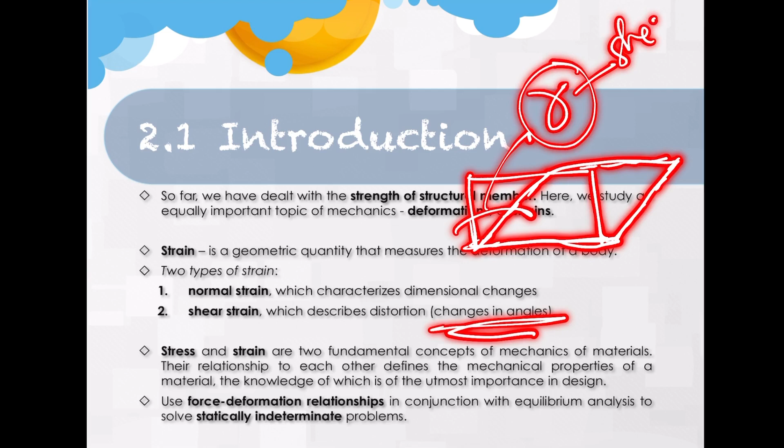So stress and strain are fundamental concepts of mechanics of materials. Their relationship to each other defines the mechanical properties of the material. It's important to know the stress and strain.

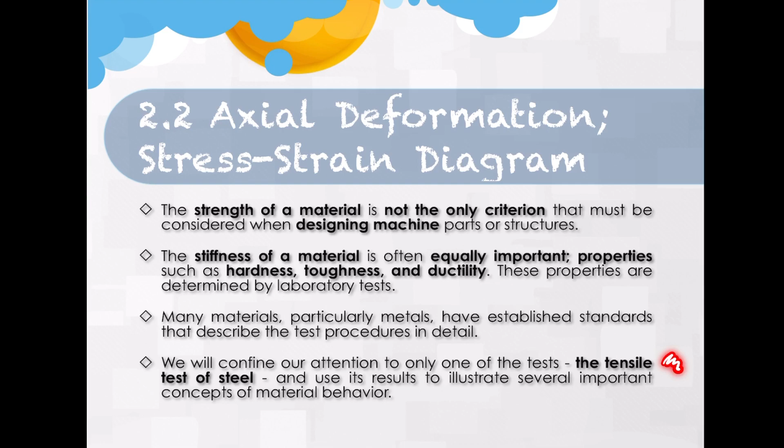We will confine our attention to only one of these tests, which is the tensile test of steel, and use its result to illustrate several important concepts of material behavior.

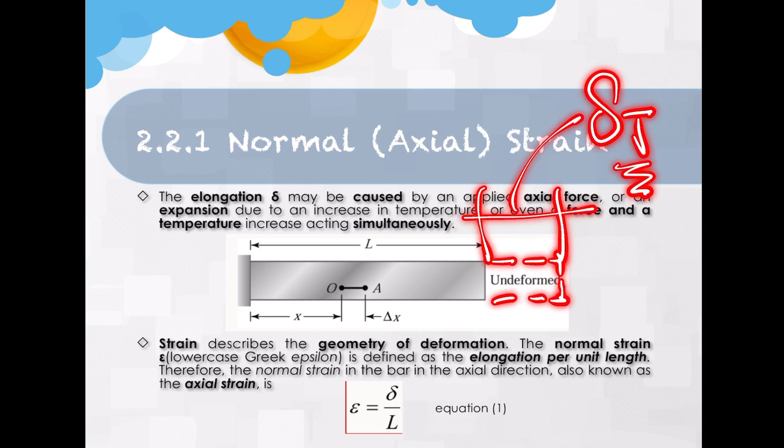Strain describes the geometry of deformation.

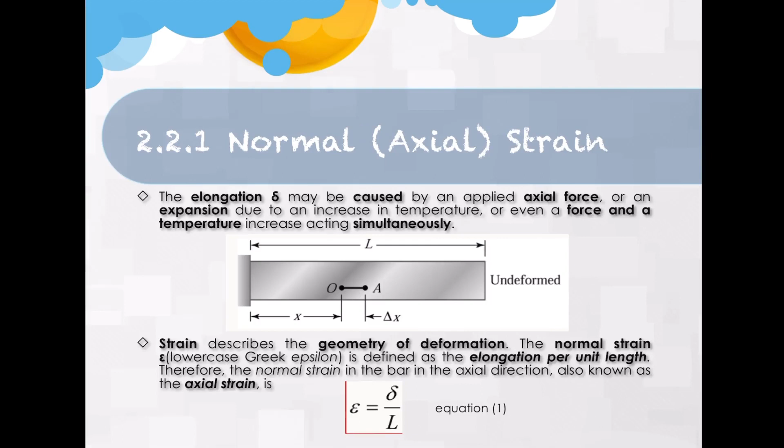Epsilon. Deformation, kung pila yung giinat, say in mm per unit length. So, kani siya nga length say in mm. So, mm per mm, pwede na siya mag-cancel out. Or say inch per inch. So, mag-cancel out. So, kaning strain is a dimensionless quantity. However, units such as this one are frequently used for normal strain.

If the deformation is not uniform, so dili siya uniform ang shape sa imong bar. Ang pag-apply sa load, dili uniform. May possibility ang pag-deform ana nga bar or sa structure is not uniform. So, gamitan na siya og integration. So, kung pila yung deformation kada unit length.

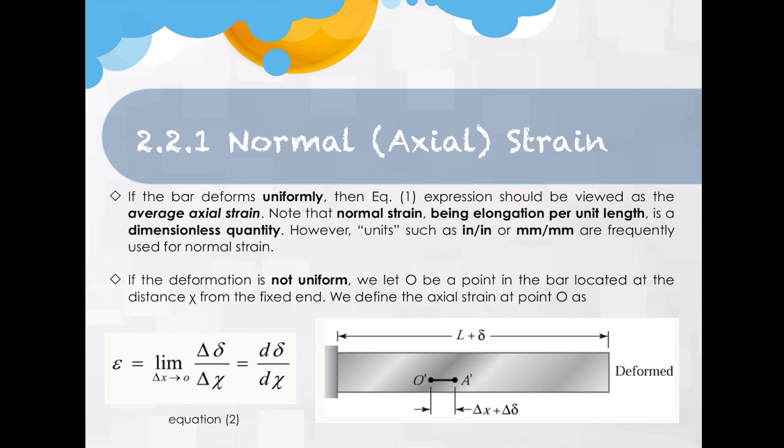So, magkakaroon unit strip of length dx. So, kung pila din yung deformation, i-add mo siya from this point padulong sa pinaka-end sa length, from 0 to end. So, i-add mo tanan or integrate mo tanan deformation from 0 to L para makuha nimo iyang total or average na value.

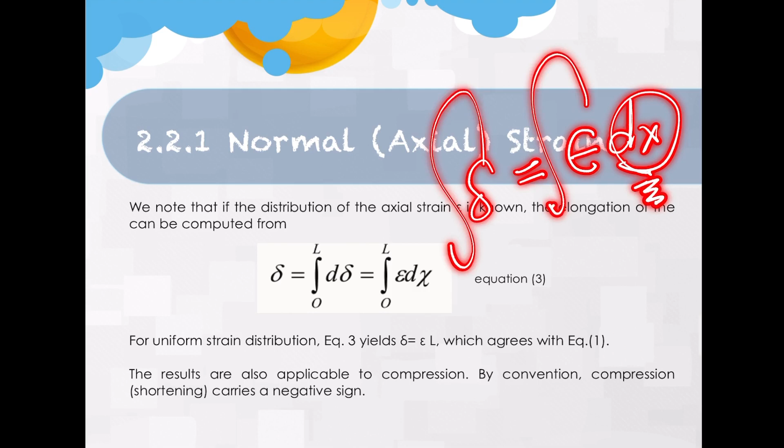So, deformation equals strain times length. Per unit length yung mga i-add. So, i-integrate or i-add ni mo tanan. Parihas pa na siya sa equation ganina. Deformation, strain, length, where kana siya is dx, or strain is equal to deformation per unit length.

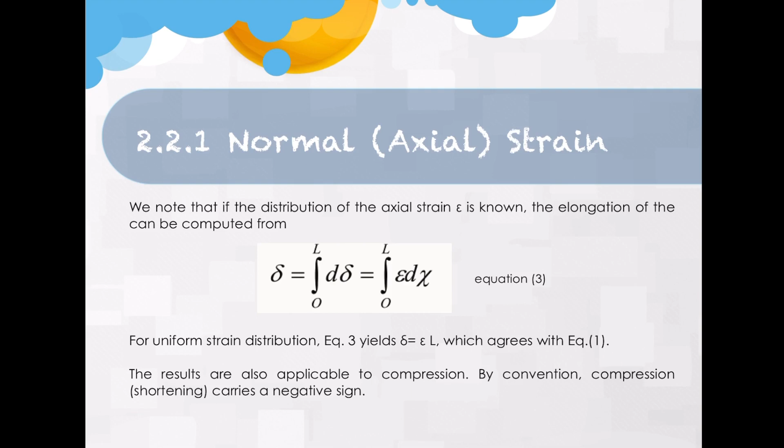The results are also applicable to compression. So, hindi lang ang pag-elongate or tension. But, if imuhang structure is subjected with a compressive force, then there is a shortening na mahitabo. So, imong deformation karon is negative iyang value. Carries a negative sign if the structure is subjected with compressive force.

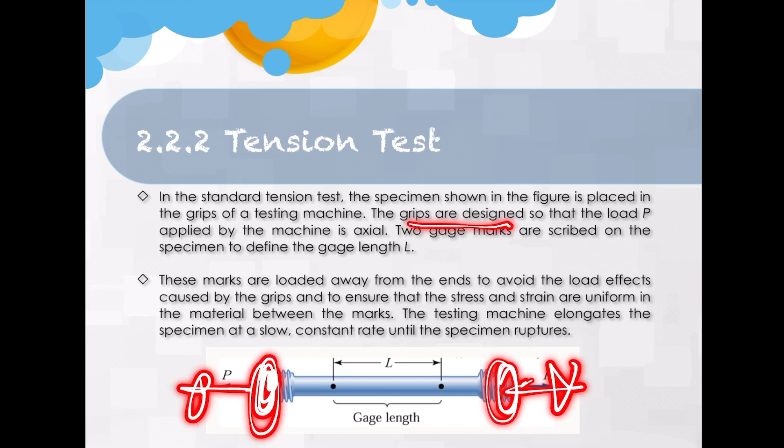So, what's mahitabo if we subject our, say, steel. So, in a standard tension test, the specimen shown, say, steel bar, in the figure is placed in the grips of a testing machine. So, grip siya dira, both sides. I-apply na siya og force. So, giinat siya. The grips are designed so that the load P applied by the machine is axial. So, along this axis. Two gauge marks are scribed on the specimen to define the gauge length L.

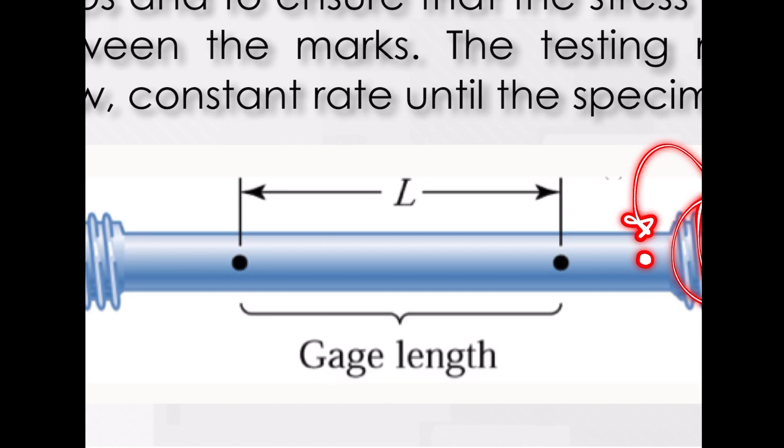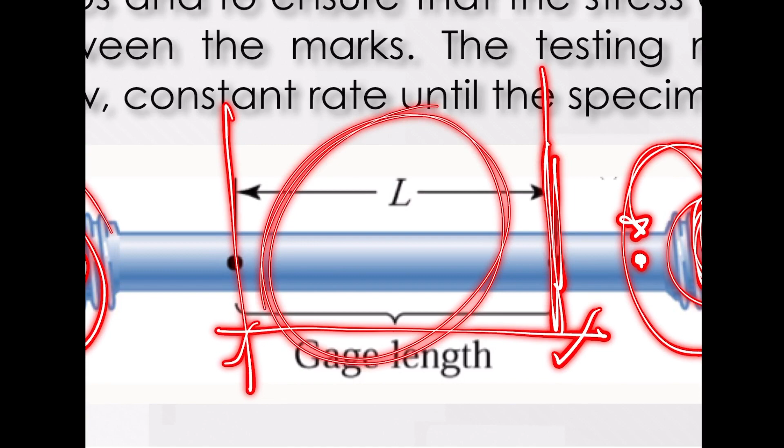So, sa bar, dili pwede nga mag-gauge sa ends. Kay maapektuhan man na siya diri, effect. Kaya doon ra siya sa katong gainat. So, mangita ka og length na medyo layo from the ends na i-apply og force para makuha nimo kung uniform gid ang deformation ana nga particular segment sa imuhang bar. These marks are located away from the ends to avoid load effects caused by the grips and to ensure that the stress and strain are uniform.

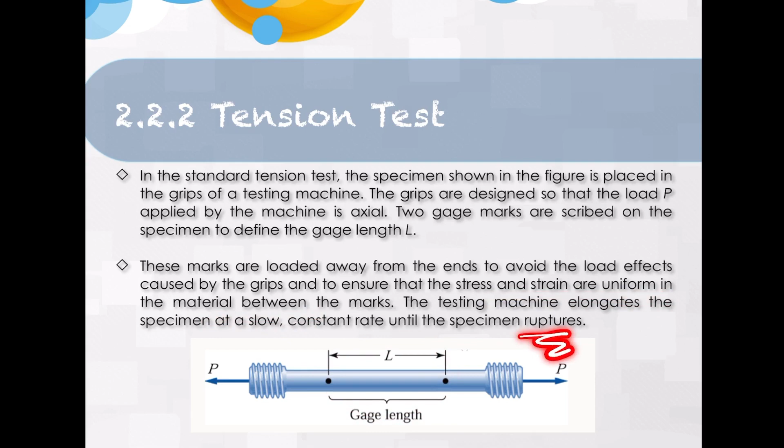So the testing machine elongates the specimen at a slow constant rate until the specimen ruptures or fails. So, unsay result dayon? Kani siya tension test of steel, ug iyahang corresponding diagram. So, i-apply siya load, corresponding increase sa value sa stress and sa value sa deformation or strain. So, from 0 padulong diri up to a certain point nga ang ginatawag is proportional limit.

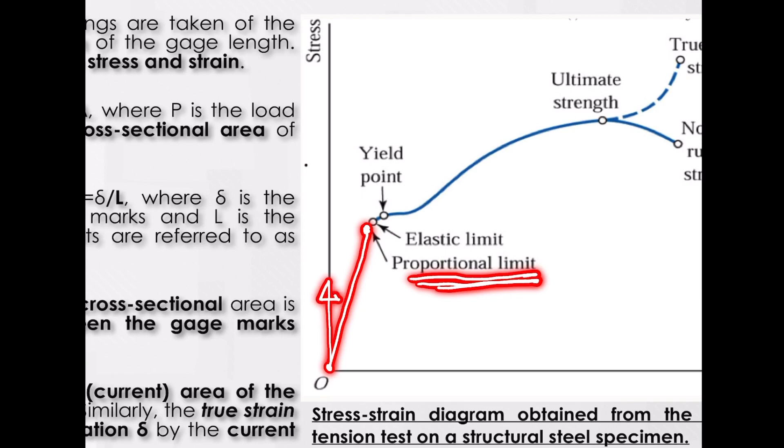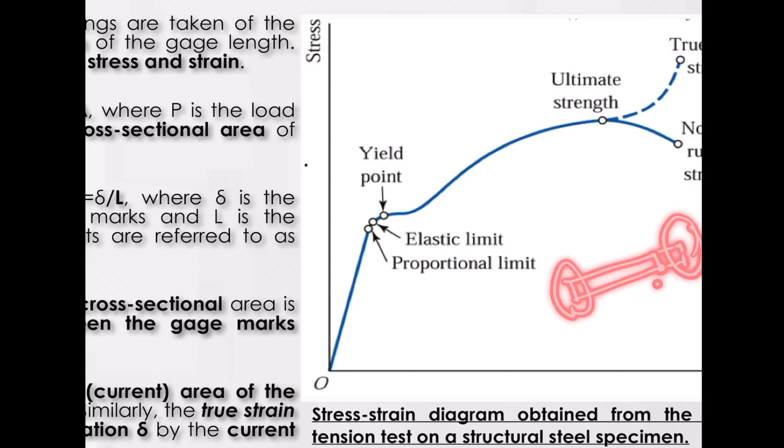Proportional meaning proportional ang imong stress sa strain; ga-increase imong stress, ga-increase pod ang imong value sa strain. Pero up to this particular point lang. So, giinat pa gid siya og ayo, niabot siya sa iyang elastic limit. Kaning elastic limit, original nga length, giinat nimo siya, so nadungagan siya. Pag imuha na siyang i-release, meaning katong nag-grip sa sides imuhang kuhaon, mubalik siya sa iyahang original nga length.

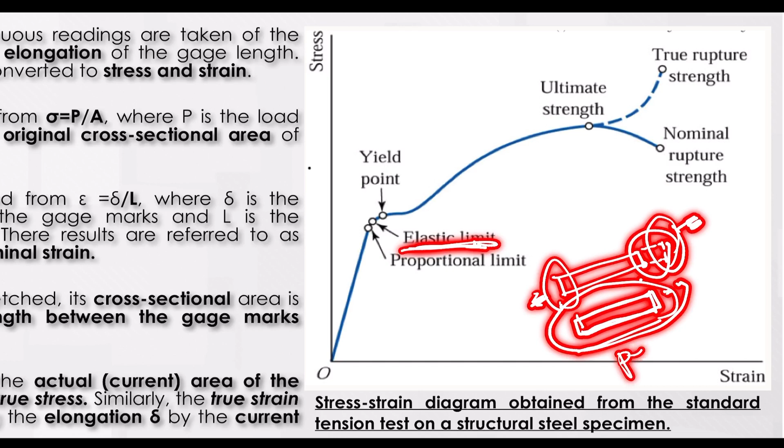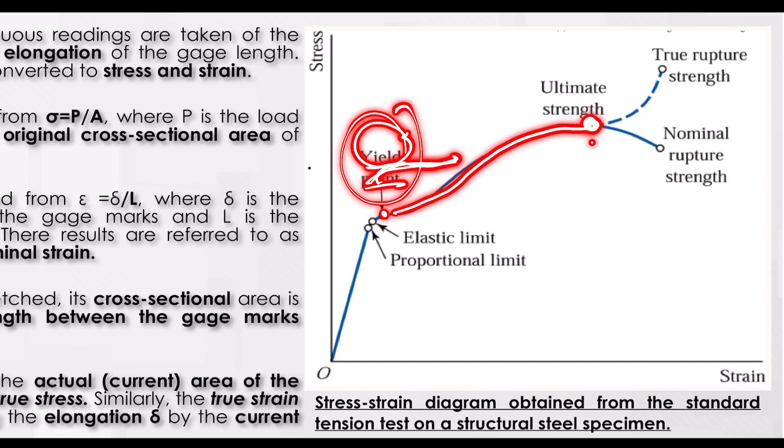Pero if there are cases nga naa gihapon gamay nga elongation, ang tawag ana is permanent set. So, gi-deform gyud siya. So, continue nga gi-apply ang force until maabot siya sa yield point. Kaning yield point, meaning ni-yield na gyud ang imong steel. Kung niabot na siya sa point nga nag-deform na siya, nagpadayon lang siya deform, mag-give way. Until niabot siya sa iyang ultimate strength, ang pinaka-last na strength na iyang gi-exert before siya nag-rupture.

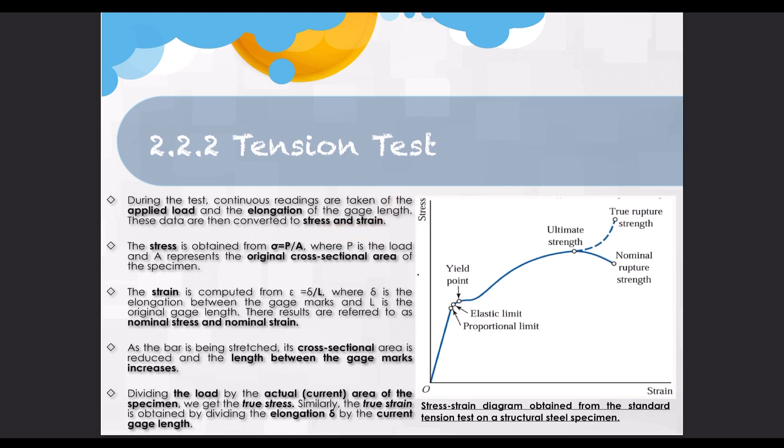Okay, during the test, continuous readings are taken of the applied load and the elongation. So, nakahimo siya og stress and strain diagram. The stress is obtained from the formula stress equals load over area, where the load is the actual applied load, and the cross-sectional area of the specimen nga gi-test.

Ang strain pod is computed using this equation. So, epsilon, deformation per unit length. Dayon, elongation between katong gauge marks niya nga gibutang. Tapos, ang length is the original length. So, ang result ani is nominal stress and nominal strain.

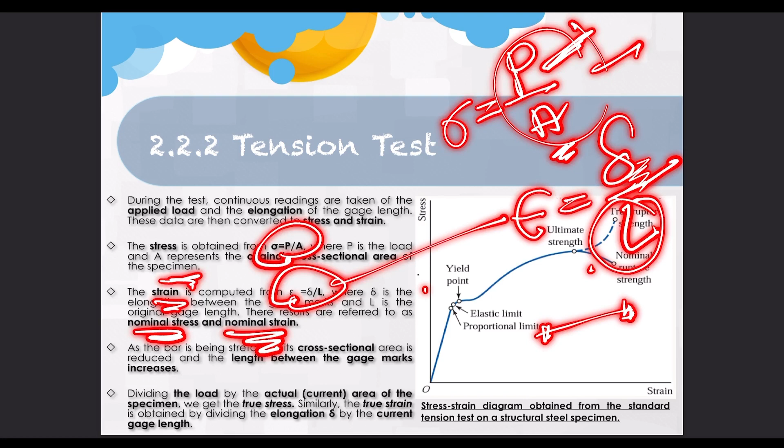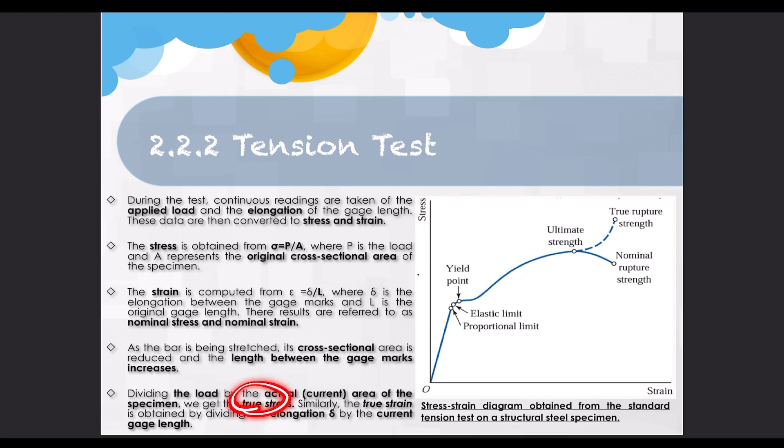As the bar is being stretched, the cross-sectional area is reduced because it's being elongated, so the length between the gauge marks also increases. The gauge marks become taller compared to the original gauge length before the specimen was subjected to force. Dividing the load by the actual current area of the specimen that was stretched, you get the value of true stress. True strain is the elongation divided by the current gauge length, the length that was stretched, and you get the value of the true strain.

As seen in the figure, the stress-strain diagram is a straight line from point O to the proportional limit. This plot is a manifestation of Hooke's law, meaning the stress is proportional to strain.

So we have the equation, this is called Hooke's law: stress equals modulus of elasticity times strain. Modulus of elasticity is specific to the material you are using. It's a material property, known as the modulus of elasticity or Young's modulus. Its unit is Pascal or PSI. This is usually given in the problem, depending on what material is used. For steel, its corresponding value is 29 times 10 to the power 6 PSI, or 200 gigapascal, where giga means times 10 to the power of 9 Pascal.

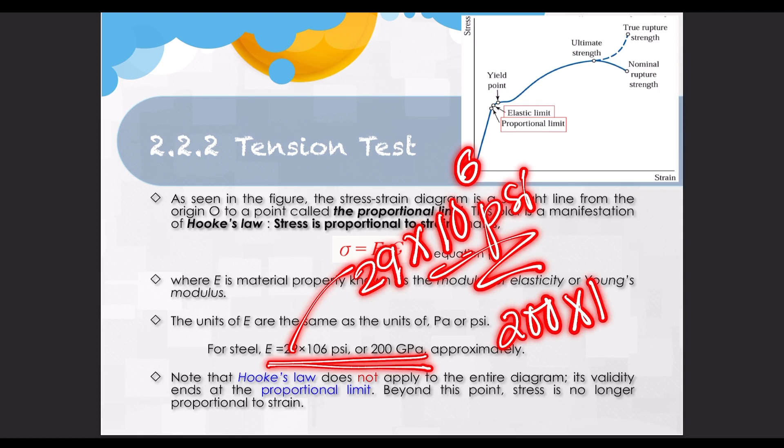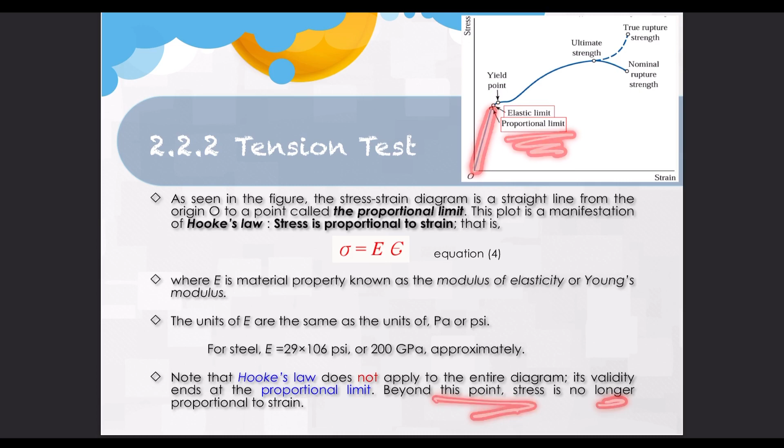Hooke's law is only applicable up to the proportional limit. Beyond that point, stress is no longer proportional to strain.

Now let's go over the description of each point along the diagram. The elastic limit: the material is said to be elastic if, after being loaded, it returns to its original shape when the load is removed. But if there is permanent deformation that remains after removing the load, then it is called permanent set.

The yield point is the point where the stress and strain diagram becomes almost horizontal, so it's called the yield point. The corresponding stress is known as yield stress or yield strength. Beyond the yield point, there is an appreciable elongation of the material—you can really see it elongate. So it has truly yielded, stretching significantly.

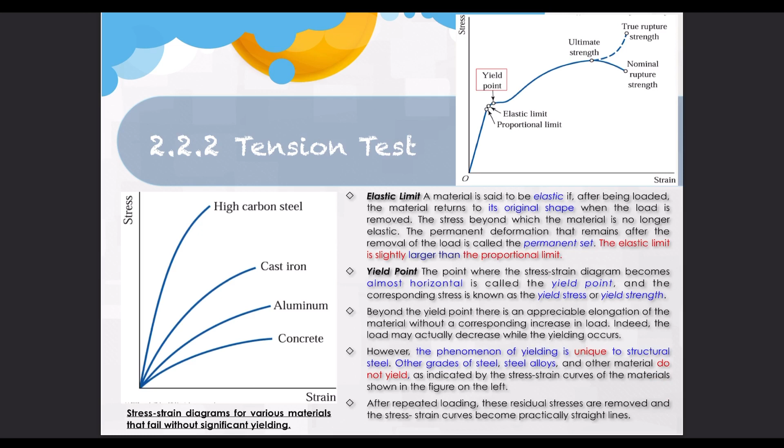It breaks suddenly. After repeated loading, these residual stresses are removed and the stress and strain curves become practically straight lines. So in this case...

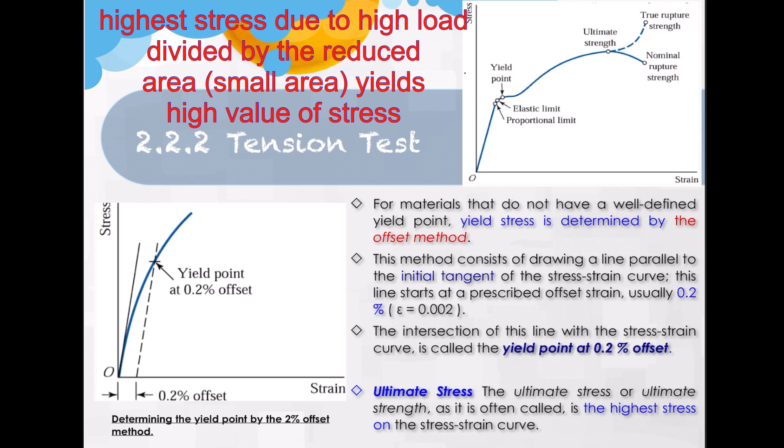Then the ultimate stress, or the ultimate strength, is often called the highest stress on the stress strain curve—the highest or last strength that it exerts, since it resists the force applied to it, exerting a large stress. The maximum or highest stress that can be found on the stress strain diagram is called the ultimate strength, before the specimen fails.

Okay, then we have rupture stress. The rupture strength is the stress at which failure occurs. This happens to the specimen when its cross-sectional area shrinks and its gauge length elongates until it ruptures.

The nominal rupture strength is computed by dividing the load at rupture by the cross-sectional area, giving you the nominal rupture strength. The true rupture strength is calculated using the reduced area, not the original direct area. The difference between these two values results from a phenomenon called necking. As failure approaches, the material stretches very rapidly, causing the cross-section to narrow.

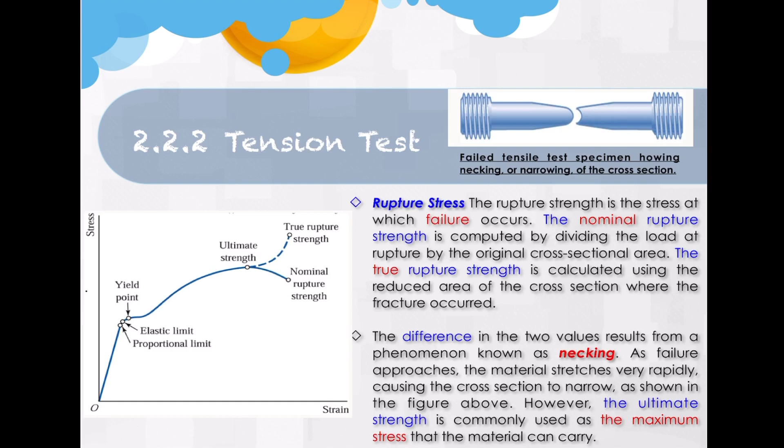The ultimate strength is commonly known as the maximum stress that the material can carry. Then we have working stress, also called allowable stress, which is the maximum safe axial stress used in design. So in our past problems, we were given allowable stress, allowable shear stress, and allowable bearing stress — these are the maximum safe axial stress values used in design.

In most design, the working stress should be limited to values not exceeding the proportional limit, so the stress values used for design should be within the proportional limit. However, once you go beyond the proportional limit, the structure will yield and start to deform, and we don't want that to happen. So the stress used for design should remain within the proportional limit.

However, because the proportional limit is difficult to determine accurately, it is customary to base the working stress on either the yield stress or the ultimate stress. So working stress is based on the yield point divided by its factor of safety, or it can be based on the ultimate strength divided by the factor of safety.

The yield point is selected as the basis for determining the working stress in structural steel because it is the stress at which a prohibitively large permanent set may occur. For other materials, the working stress is usually based on the ultimate strength. So for structural steel, base it on the yield point; for other materials, base it on the ultimate strength.

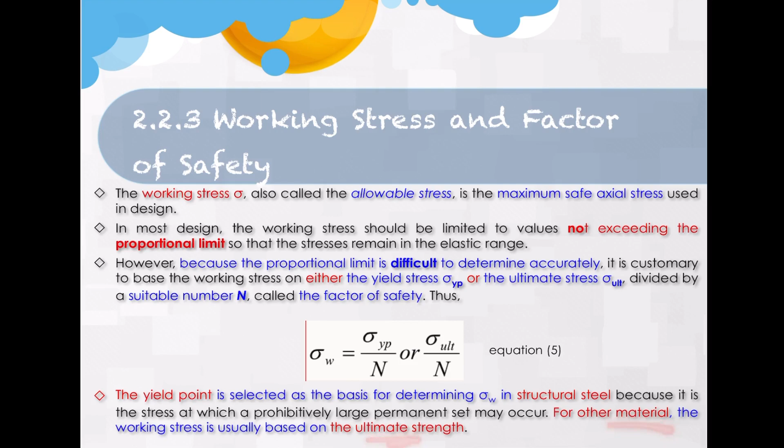Stress is proportional to strain times modulus of elasticity. Then strain is deformation per unit length, so strain times E equals stress, and stress is load over area. So we get deformation, which is equal to P times L over A times E, or PL over AE.

So that's the equation going forward and backward. If the strain or stress in the bar is not uniform, then this equation is invalid.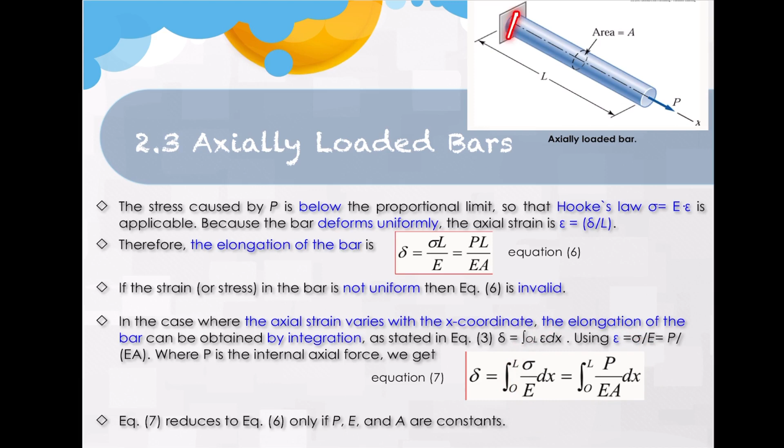So we use integration instead — we add up the deformation from a starting point to the total length. The magnitude of the internal force P must be found through equilibrium analysis. A positive tensile force results in positive elongation.

In US customary units, these are the units used: for modulus of elasticity, it's PSI or pounds per square inch. The units of the other variables should be P in pounds, length in inches, and area in inches squared. In the SI system, modulus of elasticity is in Pascals, or Newtons per meter squared, with corresponding units for the other variables in PL over AE.

As long as the actual stress is in the elastic range, the elongation or shortening of a bar is very small compared to its length. So this property can be utilized to simplify the computation of displacements in structures containing axially loaded bars, such as trusses.

Okay, problem number 1. The steel propeller shaft ABCD carries the axial loads shown in the figure, at points A, B, C, and D, with actual loads of 2,000 pounds, 6,000, and 4,000. Determine the change in length of the shaft caused by these loads — so we need the total change in length, depending on whether it lengthens or shortens.

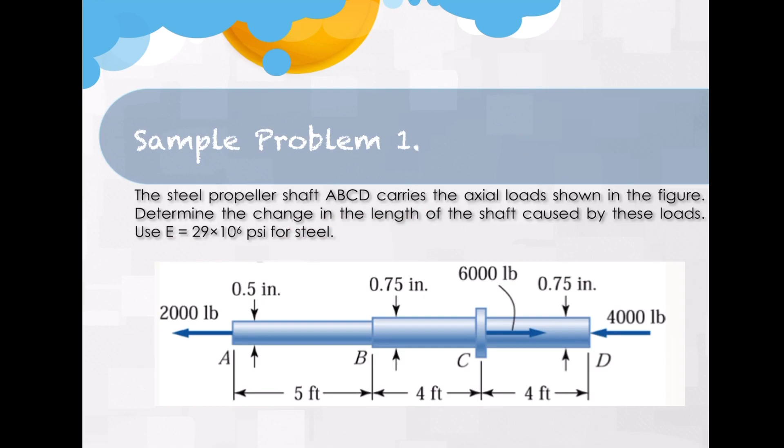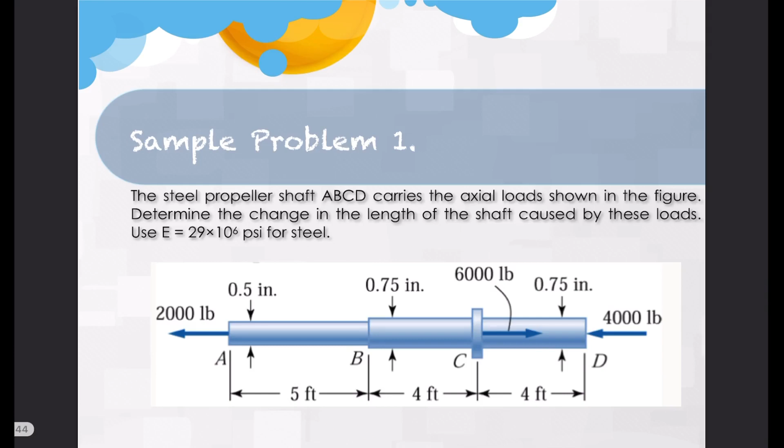It's either going to lengthen or shorten, so what we need is the total change in length. Use E, the modulus of elasticity, equal to 29 times 10 to the power of 6 psi for steel — that's the given modulus of elasticity for steel. So what we need to find is the deformation, or the change in length.

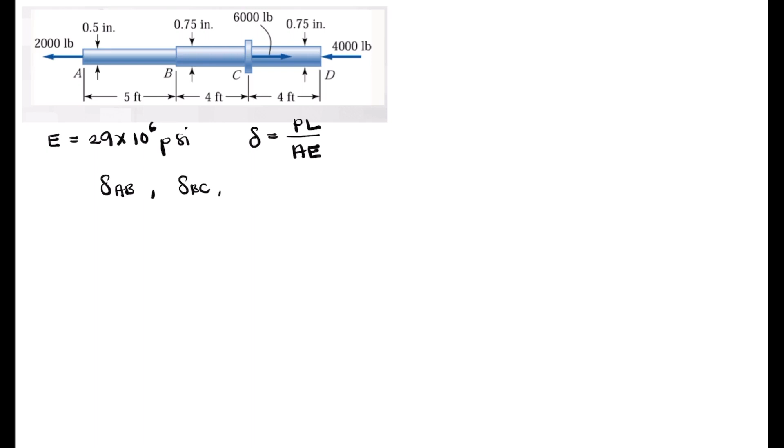What's the formula for deformation? Deformation is equal to load times length over area times modulus of elasticity, PL over AE. So we need to solve for the change in length or deformation in segment AB, segment BC, and segment CD, then add all three together to get the total deformation of the steel propeller shaft ABCD.

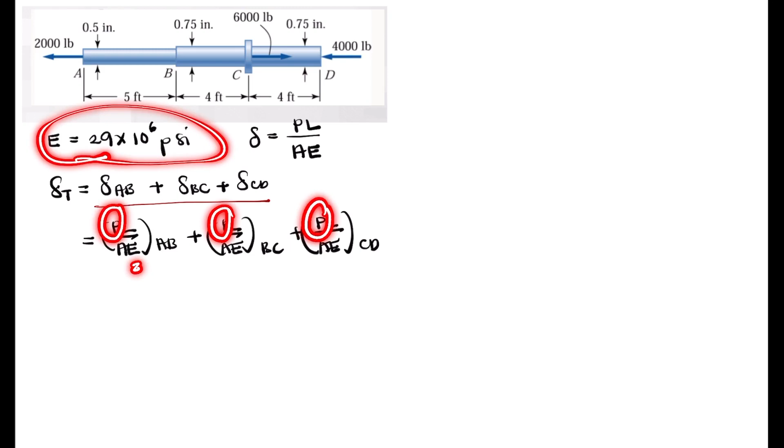So ang kuhaon na ginato, kanina ka value sa P. PAB, PBC, PCD, kuhaon na to na siya. Pareha pa ito pagkuha before ko sa composite nga bar, mag-cut ta sa middle or any bisag aha dira sa AB. Then tanaw na to ang force dahil nag-exert kani siya nga part. So natay 2,000 pounds padulong sa left. So para equilibrium siya or para balance siya, dapat natay force to the right. So muna siya itong PAB.

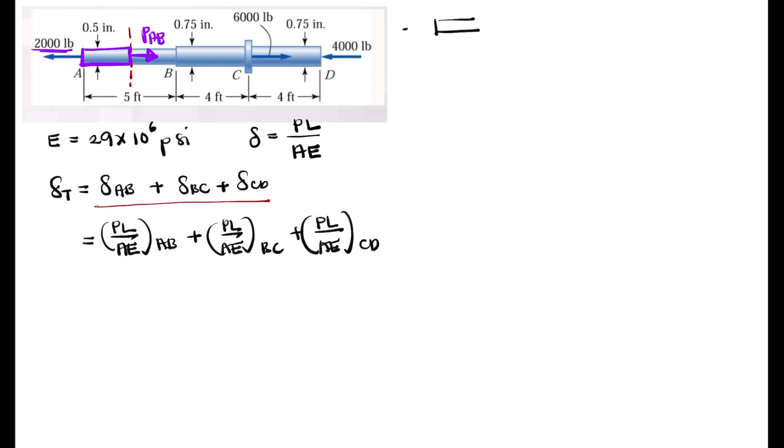2,000 pounds, this is PAB. Summation of forces equal to 0. Summation of forces horizontal, PAB is clearly 2,000 pounds. Gainat siya, so this is a tensile force.

How about PBC? So dire na siya i-cut. You can choose to analyze the right or the left section, so bisag asa lang ang analyze. So say ang left atong i-analyze, BC. PBC given, so again to balance the horizontal forces along aning atong gi-analyze na section. So para ma-balance ni, dapat na atay force na ga-exert padulong sa right. So PBC therefore is equal to

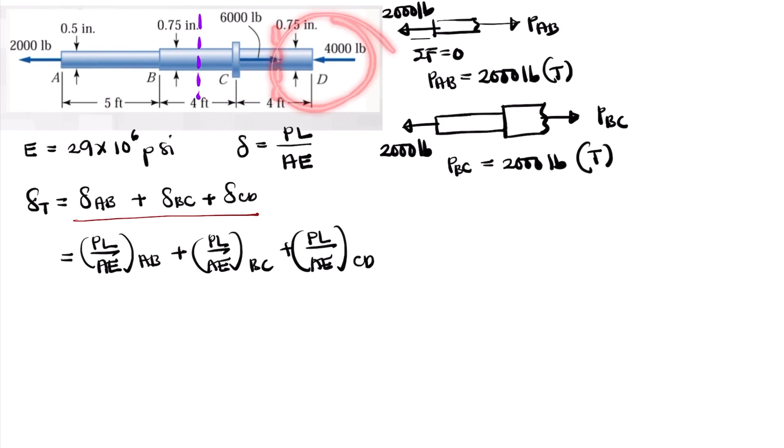2,000 pounds, again tensile. Last section. Kung ato ni siya i-cut, analyze the right section. So naatay 4,000 pounds. So para mabalance siya, kung nakay force to the left, nag-push pa doon dira, dapat diri po, tapos kayo push to the opposite direction

so that it is in equilibrium. So say this is PCD. Summation forces, PCD is equal to 4,000 pounds. CD is compressive, so kung tanaw natin ni siya, kani tensile, compressive.

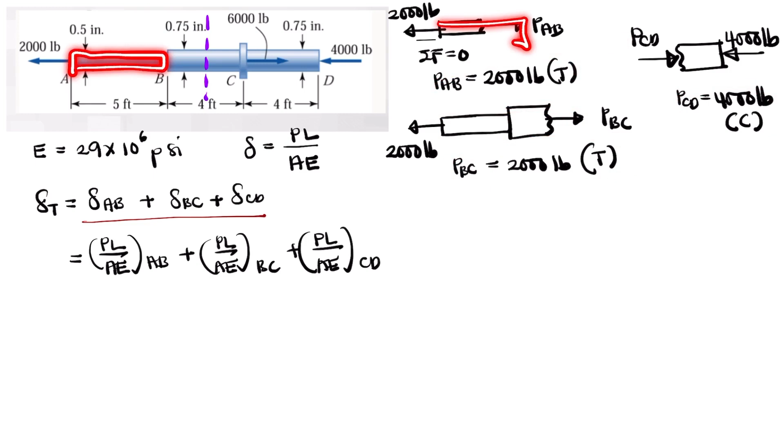Pag tensile, so meaning ang kaning AB ni-lengthen or ni-elongate. So nadungagan siya og value nga ana nga deformation, so ni-elongate na siya. Kani pod still tensile, so ni-elongate pod siya. Pero kaning CD, compressive force ang ga-act within this part of the shaft, so compressive meaning ni shorten na siya nga part sa shaft. So plus minus, so pwede nato ni siya, dili na lang nato i-change sa formula.

So this is equal to force AB is 2,000 times length niya is 5 feet. This is pounds, dapat ang deformation is in millimeters, so tanaw na to iyahang unit. Kaya siya dapat, no, not millimeters, inch. Inch mo na yung given. Inches, kani in pounds, kani dapat naka-inch na siya, kani dapat naka-inch squared, kani naka-PSI. So dapat consistent in units para maka-arrive ikaw inch na answer.

So yung length, ang given is 5 feet, convert it to inches, 5 times 12 divided by area. Ang iyahamang gihatag is diameters, so diameter sa AB is 0.5. So pi d squared over 4 times E na 29 times 10 to the 6th PSI. Plus again, 2,000 times length niya is 4 times 12 over pi, 0.75 squared over 4 times 29 times 10 to the power 6, plus compressive, so negative 4,000. Length is 4 times 12 divided by pi, diameter is 0.75 squared over 4, 29 times 10 to the power 6.

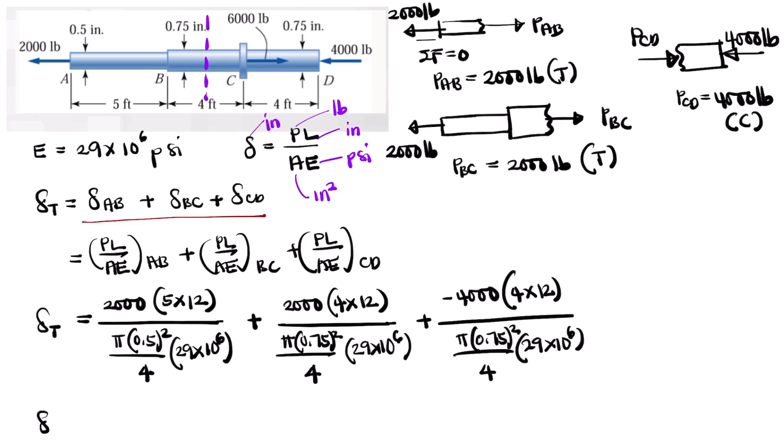So pila iyahang total change in length or total deformation for the entire shaft. So let's compute 2,000 times 5 times 12 over pi times 0.5 squared over 4 times 29 times 10 to the power of 6.

Okay plus 2,000 4 times 12 over pi times 0.75 squared over 4 times 29 times 10 to the power of 6. Tapos last is minus na ako dito, minus 4,000, 4 times 12 over pi times 0.75 squared over 4, 29 times 10 to the power of 6.

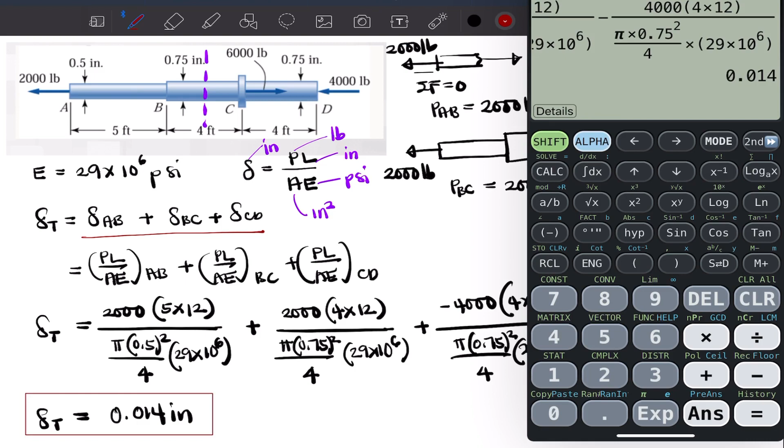So answer is 0.014 inch. So manikaroon, ang change in length or deformation sa steel propeller shaft that is subjected to axial loading nga 2,000, 6,000, o 4,000 pounds.

Sample problem number 2. It says cross-section of a 10-meter long flat steel bar AB has a constant thickness of 20 mm. Its width varies as shown in the figure, so iyahang width from 40 mm to 120 mm. So pwede lang ito, vary siya. Calculate the elongation of the bar due to the 100 kilonewton axial load applied. Then use modulus of elasticity 200 gigapascal.

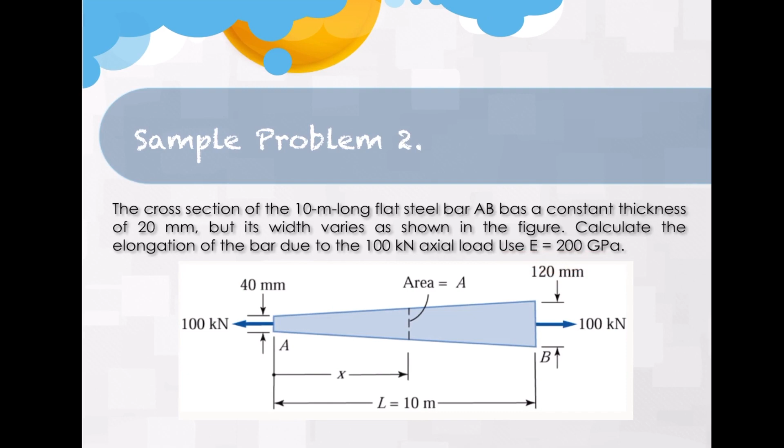Okay so itong sketch ang figure. So solution.

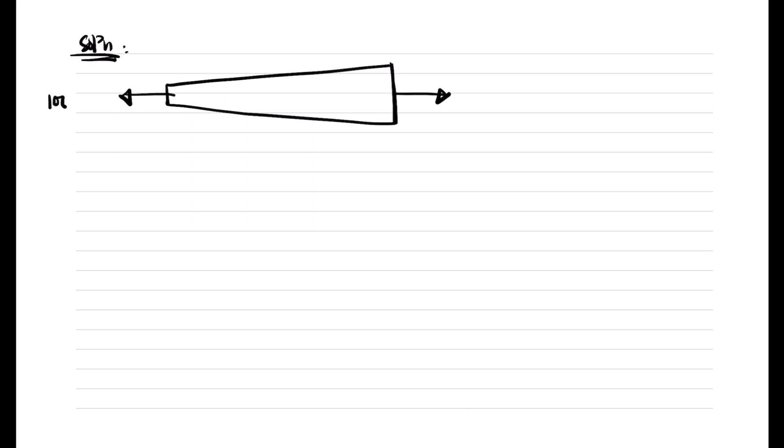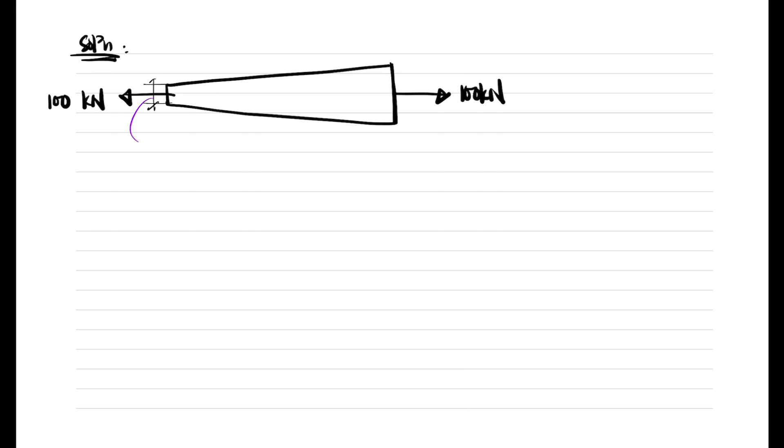A flat bar 10 meters long is subjected to axial loads of 100 kN. Tapos, kani daw siyang width niya gavari. So, diri, it is 40 mm. Diri dayon, this one is 120 mm. The length of the bar is 10 meters.

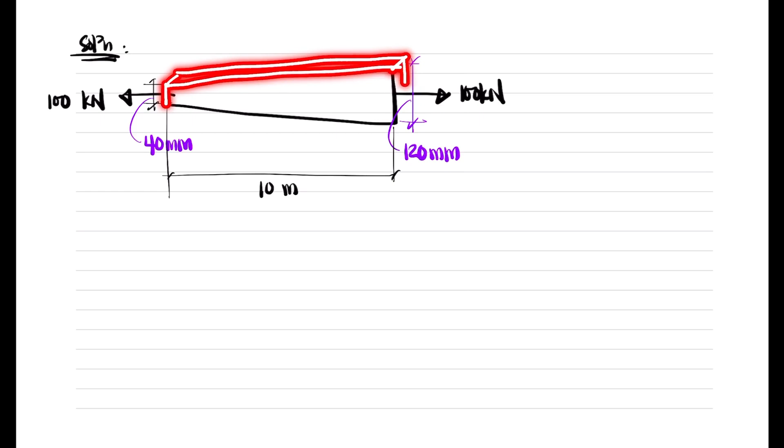Tapos, unsa dayon ang iyahang... The bar has a constant thickness of 20 mm. So, from the point sa bar padulong dito, constant yung thickness. So, yun na niya itsura. Ano siyang thickness sa bar, which is 20 mm. Ang pangutana is, unsa dayon ang elongation of the bar.

Okay, remember, the formula for elongation or deformation is PL over AE. But kani nga equation, magamit nimo siya diretso if ang imong bar constant iyahang shape, iyang area constant from 0 up to its length. Pero in this case, gavari man siya. So, dili pareha ang area, mag-vary ang value sa area. So, dili na siya pwede diretso magamit.

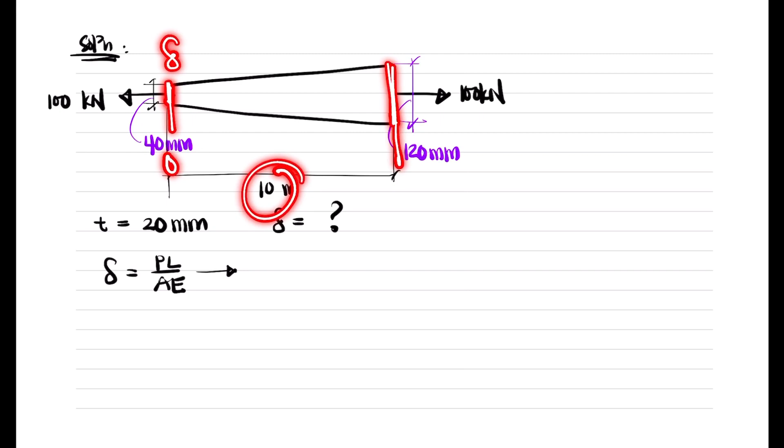What we can do is kuhaon nato ang elongation sa bar, deformation sa bar, gikan diri nga point padulong diri nga point. So, i-add nato tanan from 0 padulong sa 10 meters until we get the total deformation. So para makuha nato, kuha ta og integral sa deformation from 0 to 10.

So, makuha ta og 1 unit strip bisag asa aning bar. Say 1 unit strip nga ang iyahang length is dx, located x distance gikan diri nga point. Say kani nga height is y. So kani atong equation, ang length is dx.

So ato ni i-integrate or sum up tanan deformation gikan sa 0 to L, ug ato ipagawas ang tanan constant sa integration. So therefore this is P over E integral of 1 over A dx from 0 to L, 10 meters. So mao na siya karon atong deformation.

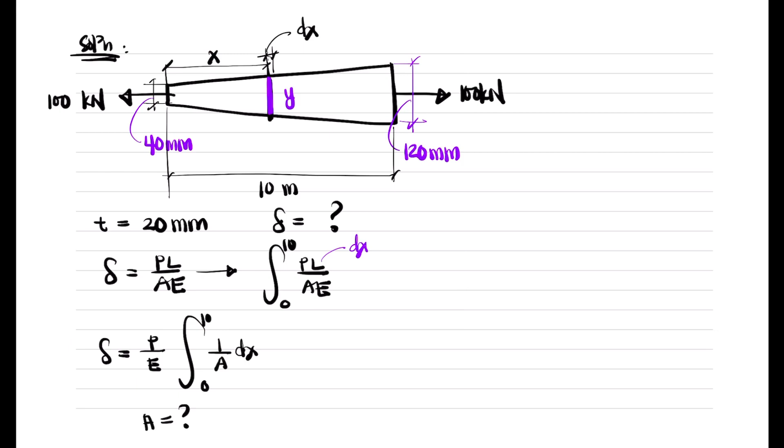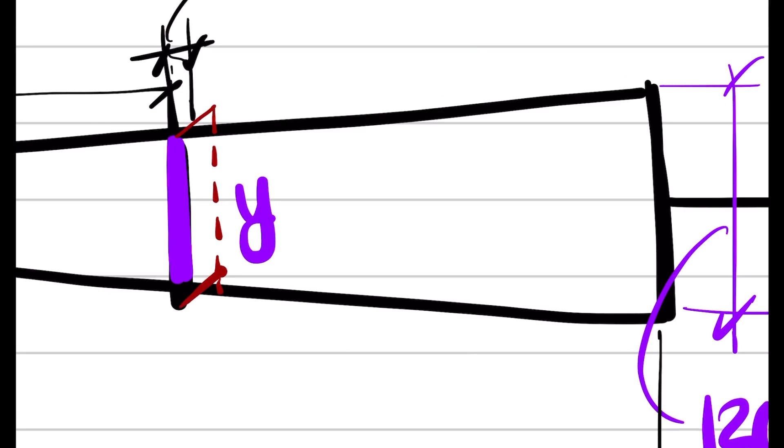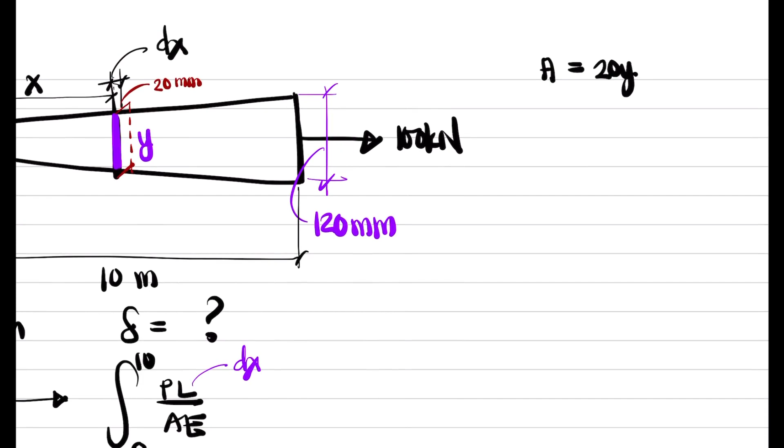So what is this? Area na siya sa 1 unit strip nga length niya is dx. So area, where iyang thickness is 20 mm, iyang height is y. Therefore, area is 20y. Dayon, what is y? So magbase ta sa value sa y from our figure, gikan diri sa middle.

Say mao ni siya ang katong x distance. So katunga siya sa y, or say butang siya nga y prime. Diri, this is katunga sa 40 mm, 20 mm. Say ang katunga niya mao na siya atong y. Or ang area karon mao na siya ang 20 mm times 2y, or 40y.

Okay, so kani siya karon atong y. Dayon, kani diri nga point padulong diri, say another y prime. Kani siya is 20 mm. What is y? Y is equal to 20 mm plus y prime. So again, what is y prime? We will get y prime gikan sa lower part sa atong figure, gamit ang ratio and proportion.

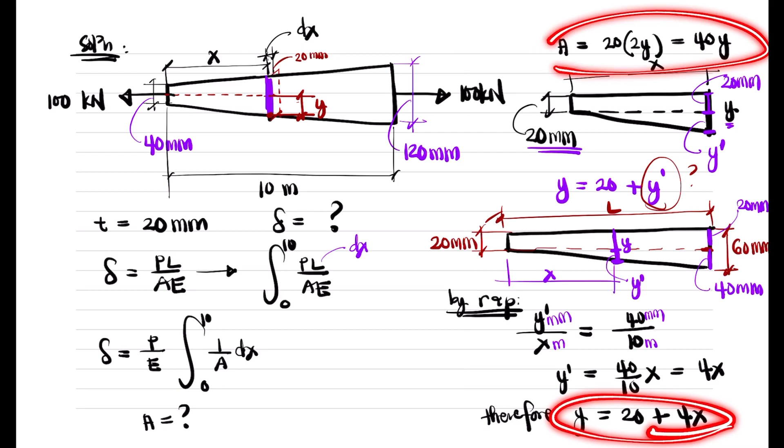So ibalik na to siya dito, mag-cancel out ang meters and meters. So what we will get is y prime is equal to 40 over 10 x, or this is 4x. If y prime is 4x, ang y nato is 20 plus y prime. Therefore y is equal to 20 plus 4x. Substitute this value of y diri sa equation sa area para makuha na nato si area. Area is 40y. Y is equal to 20 plus 4x.

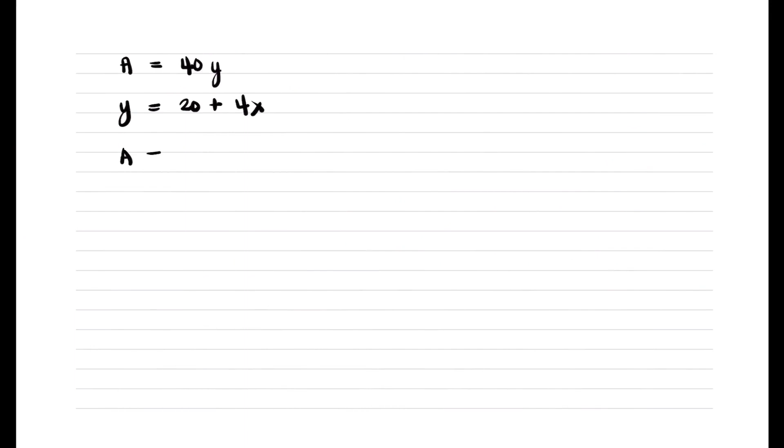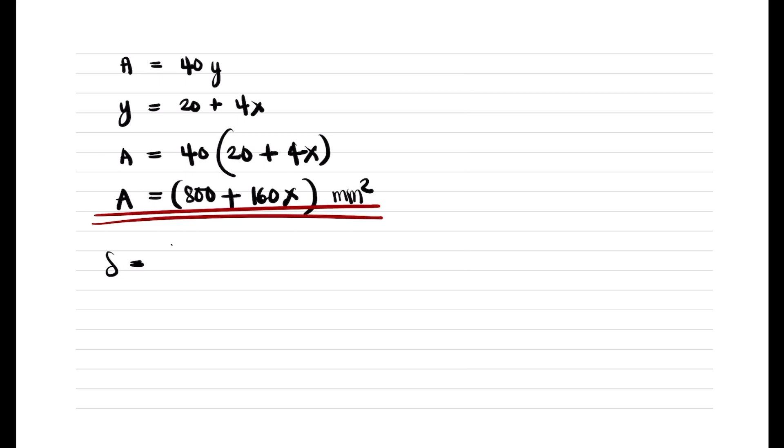Therefore, area is 40 times 20 plus 4x. Simplify, area is 800 plus 40 times 4x. This is in millimeters squared. So deformation is equal to P over E integral 1 over area from 0 to 10.

P is 100 times 10 cubed newtons, to convert siya sa newtons from kilonewtons. E is 200 times 10 to the 9 Pascal. Pascal is Newton per meter squared. Ang units, ato siya i-convert tanan in meters. Kaya nga ang range is from 0 to 10. This is in meters, para uniform, then makakuha ta og correct na answer. So this is integral of 1 over area, 800 plus 160x, from 0 to 10 dx.

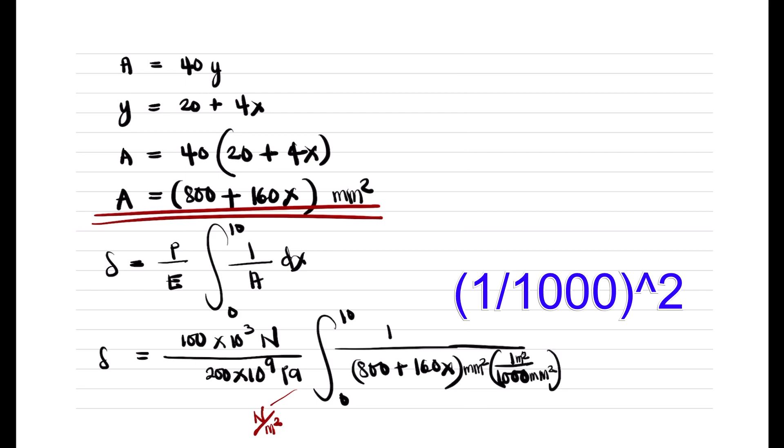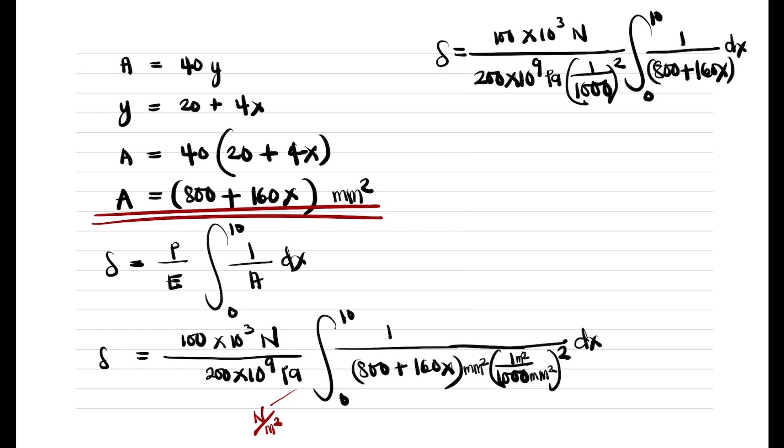Kung ato siya i-simplify sa integral, wait lang. Kana siya is in mm squared, tapos naka-meters tanan ang unit kanina. So i-convert pa siya: 1 over 1,000 squared meter squared, dx. Pwede na ito ibutang sa gawas kay constant na siya. So 100 times 10 cubed over 200 times 10 to the power of 9 Pascal, times 1 over 1,000 squared, integral of 1 over 800 plus 160x dx from 0 to 10. So mao ni ang equation. Pwede ni siya i-simplify una.

100 times 10 to the power of 3 over 200 times 10 to the power of 9 times 1 over 1,000 squared is 0.5. So deformation is equal to 0.5 times integral of dx over 800 plus 160x. This is ln of 800 plus 160x over 160, from 0 to 10. Deformation is 0.5 over 160.

Pagawas na nako ang 160. So ln of 800 plus 160 times 10 minus ln of 800 plus 160 times 0. So substitute itong duha ka values. Ang mabilin is deformation equals 0.5 over 160 times ln of 800 plus 1600 minus ln of 800.

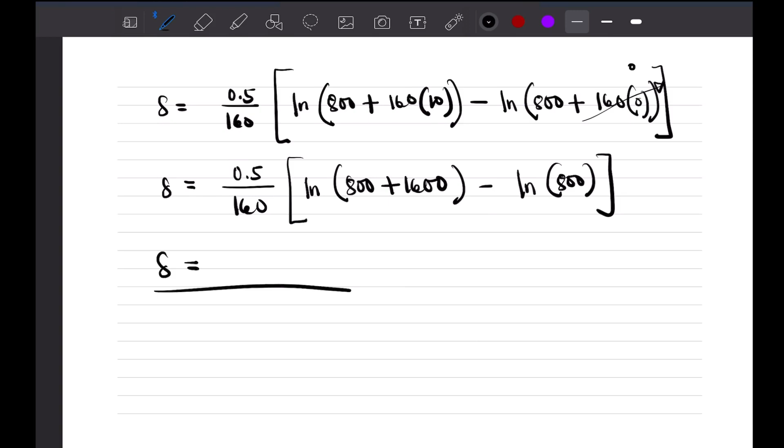So makuha na nato ang value sa deformation, which is equal to 0.5 over 160 times ln of 800 plus 1600 minus ln of 800, equals 0.00343. This is in meters, the deformation. Para mas ma-imagine nato siya, it is 3.43 millimeters.

Pero say, paabuton diri sa equation, correct na siya. Pwede na ni i-diretso sa calculator kay makacalculate man og integral form. So i-try nato kung same ba ang answer: 100 times 10 to the power of 3 over 200 times 10 to the power of 9 times integral of 1 over 800 plus 160x times 1 over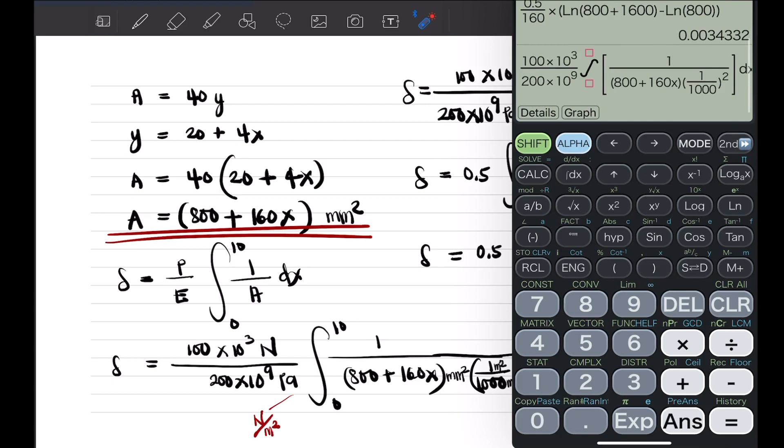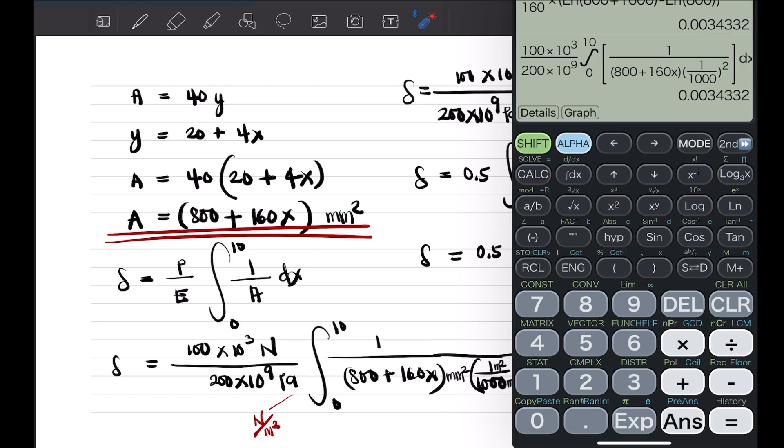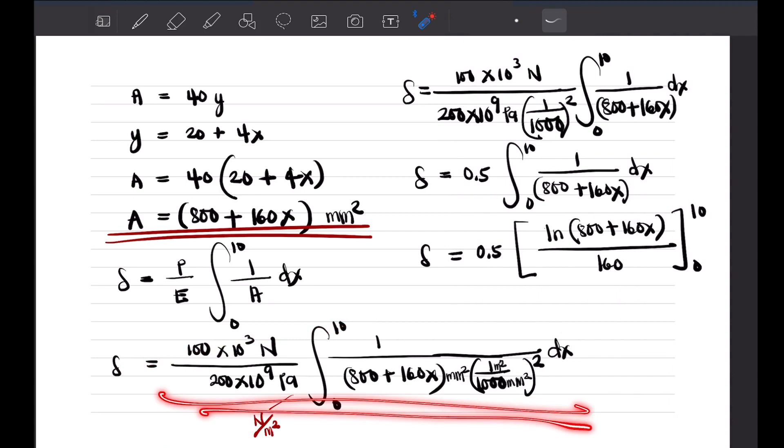1000 squared conversion, from 0 to 10 dx. So we got the same answer, 0.00343 meters. So dili na kinahanglan i-simplify ang equation, dili siya mag-matter basta makalculate ninyo siya eksakto, as long as correct ang part. Okay, so that's it for the second problem.

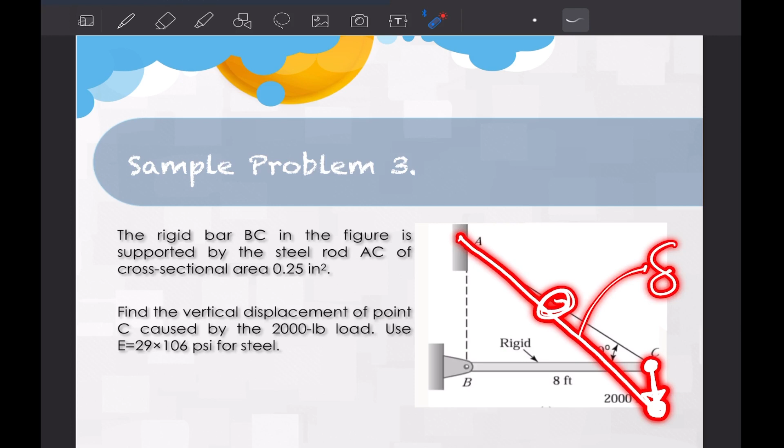The rigid bar BC in the figure is supported by the steel rod AC of cross-sectional area 0.25 inch squared. Find the vertical displacement of point C caused by the 2,000 pound load. Use E for steel, 29 times 10 to the power of 6 psi. So unsa daw ang vertical displacement sa C? Kaning 2,000 pounds i-apply sa point C, force paubos. Kaning rod mo-inat, then ma-displace ang location sa C, depende kung pila ang deform sa rod AC.

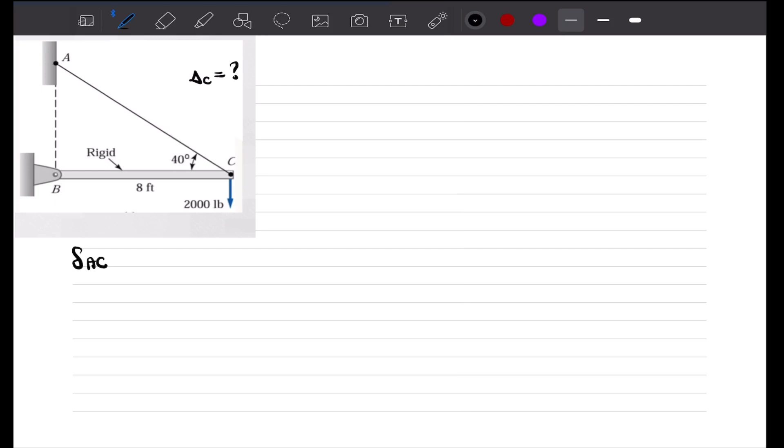So what is the displacement of C? In order to solve for the displacement, kailangan kabalo ta pila gi-deform sa rod AC, and we can solve that using the formula PL over AE. Ang area given sa problem, cross-sectional area 0.25 inch squared. Steel rod, so modulus of elasticity 29 times 10 to the power of 6 psi. Ang P, ato na siya masolve later. Ang L, pila ba na siya?

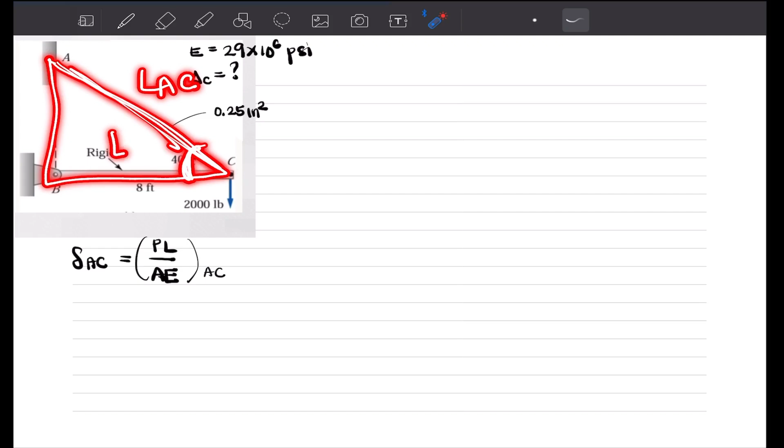LAC using cosine of 40 is equal to, cosine is adjacent over hypotenuse, 8 over LAC. LAC therefore is equal to 8 over cosine 40. 8 over cosine 40: 10.443 feet. So we have LAC. Next to solve is P.

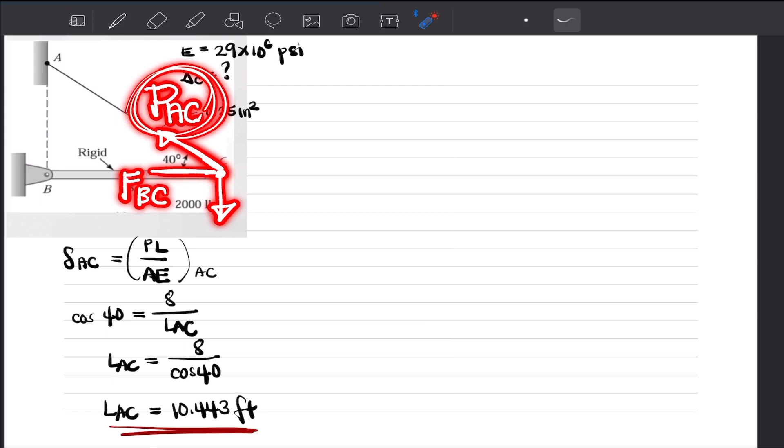Okay, first is draw the free body diagram. So, at point C, 2,000 pounds. This is the force BC. Then the tensile force, or just P. P AC. The angle given is 40 degrees. If PAC goes this way, most probably FBC is going to the right, or it's a compressive force, for equilibrium of point C.

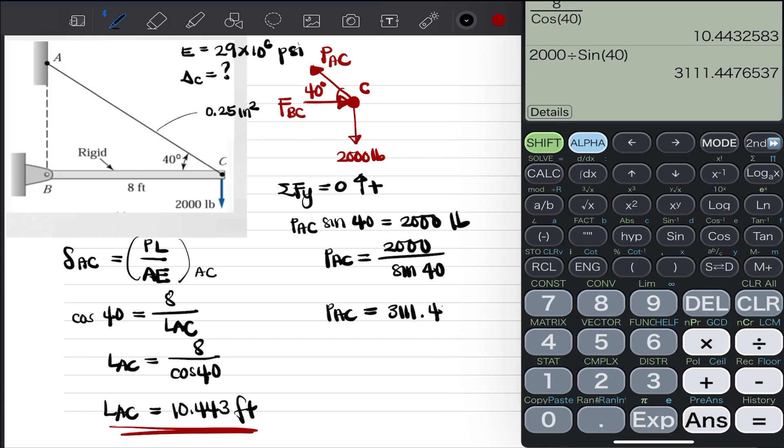Okay, so for PAC, by summing up forces along the y-axis equal to 0, upward forces positive. So we have the PAC component along y, upward. So PAC sine of 40 equals 2,000 pounds. PAC is equal to 2,000 over sine of 40. PAC is equal to 2,000 divided by sine of 40: 3111.448. This is in pounds.

Therefore, the deformation of AC is equal to PL over AE. 3111.448 times 10.443, this is in feet. So, convert it to inches, so times 12. Divided by the area, 0.25 inches squared. Then E, 29 times 10 to the power 6 PSI.

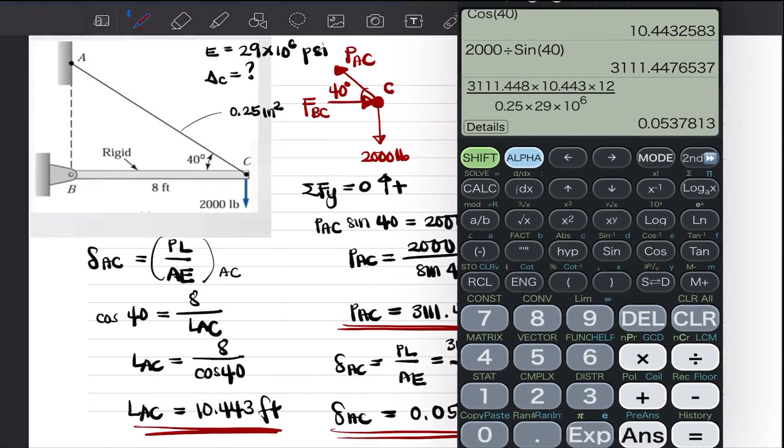Deformation AC is equal to 3111.448 times 10.443 times 12, over 0.25 times 29 times 10 to the power of 6: 0.054 inch. So, that's how much rod AC deformed. It elongated by 0.054 inches. So, looking at the figure, it elongates by this value.

This value, deformation AC. So, if we sketch it, if this is the bar BC, the original location of C. So, this is AC. So, the rod elongated. It elongated here, and we project it downward. This angle is 40 degrees. Let me sketch a perpendicular from this point going to this point. This is the deformation of rod AC.

And this is the displacement of C. So, originally C was here, AC deformed, so C was displaced. So, this is C prime, the new location of point C after deformation. So, now we solve for the displacement.

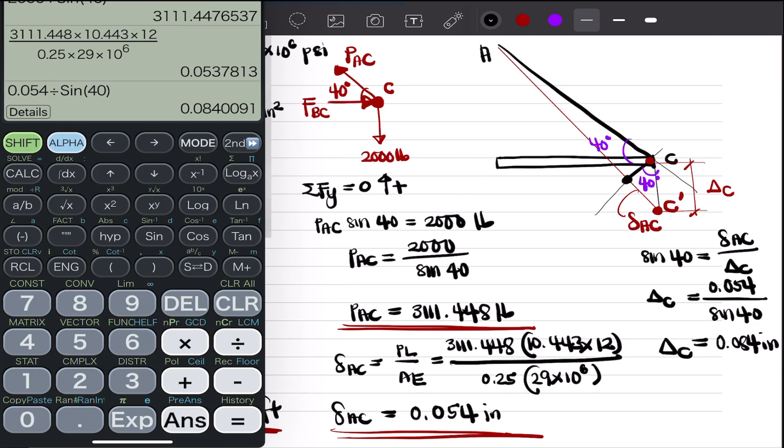Displacement of C is equal to 0.054 divided by sine of 40: 0.084 inch. So, that is the final answer. That's it for the third problem.